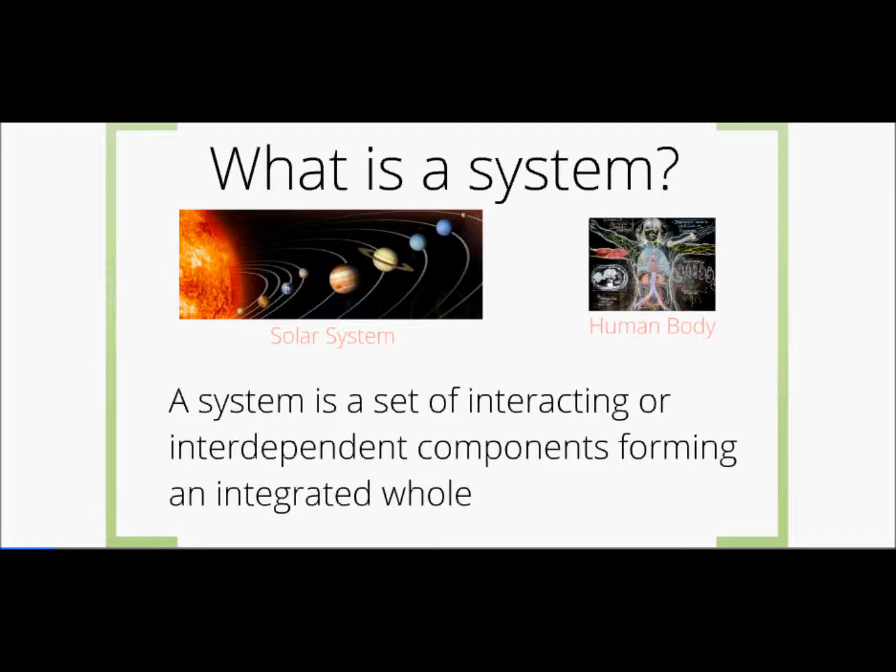What is a system? A system is a set of interacting or interdependent components forming an integrated whole. Any small problems in the system may lead to whole system failure.

We can find such an incident in the case of Toyota, where small components have been found to have quality issues, and the company has had to recall all related models, resulting in lost customer confidence.

The tsunami in Japan and flooding in Thailand disrupted the supply chain in consumer electronics and show how global supply chains are linked. At the system level, we are working on the issue of how to analyze, integrate, and manage systems.

An example of a poorly designed system is illustrated by the Far Side cartoon. This would not be an effective nor efficient system, as the boat would go around in circles as a result of the imbalance.

Let's see a simple view of a manufacturing system. A unit process at small scale can be integrated into a larger scale of complex processes.

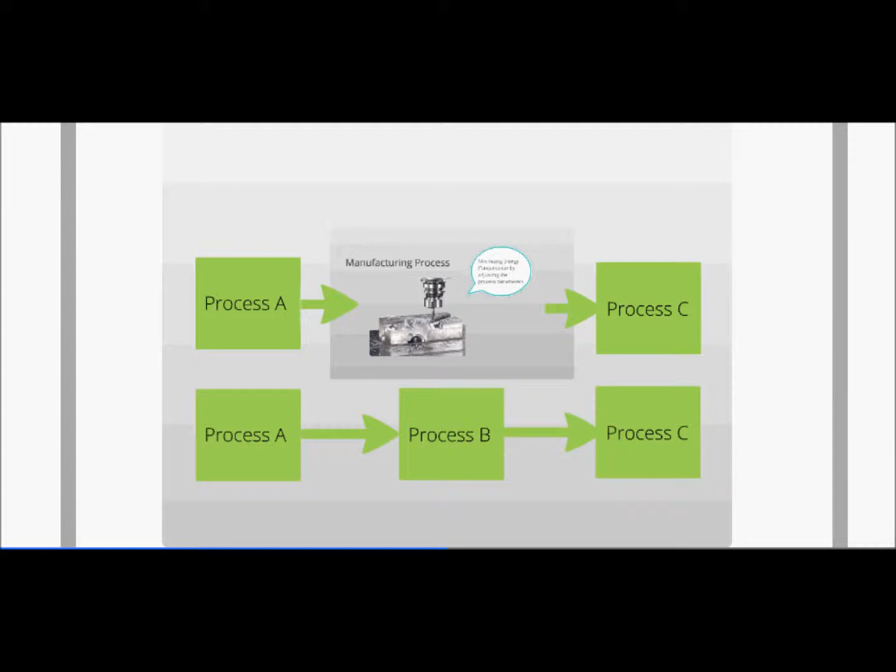With logistics support, this system can be extended to supply chains of products. A factory is composed of various machine tools.

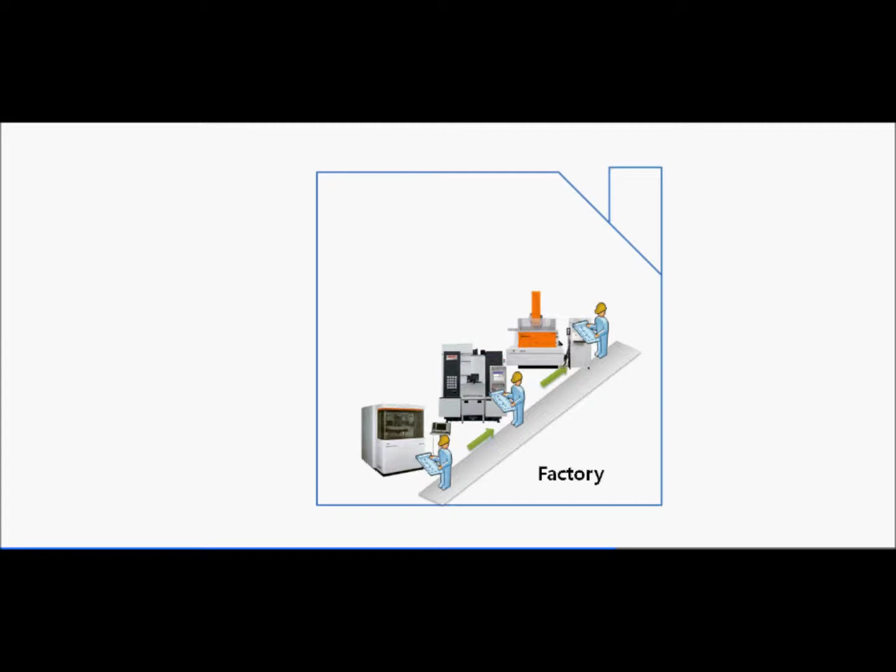In this factory example, there are 3 processes. To manufacture the products, the factory needs to define manufacturing structure among different processes and material flows. On the other hand, the factory needs to share product-related information across processes.

Due to huge amounts of data, generally data management systems are used in the factory to keep the system in control and processes working together.

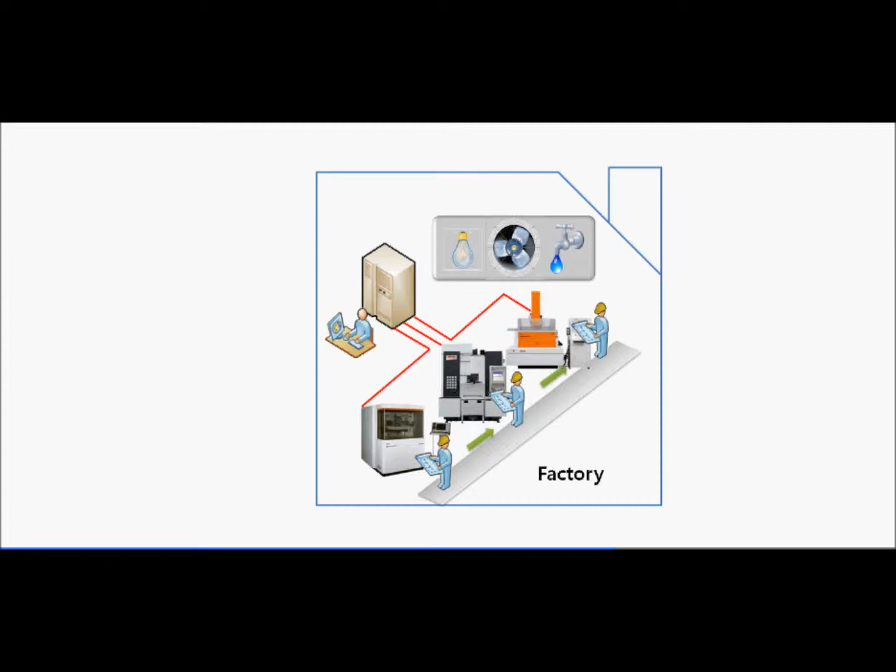Inside this factory, supporting utilities like lighting, HVAC, and water are also important. This is the factory system, and if we extend our boundary further, there would be a larger system which includes this factory. Going up one level, we have the whole supply chain as our system boundary.

In LMAS, we are also interested in greening supply chains. One of the related projects in LMAS is to find out the supply chain network design to minimize greenhouse gas emission.

In this project, we need to decide where to locate a warehouse and how to ship products from the manufacturing facility to the warehouse. This problem can easily be extended to other parts of the supply chain.

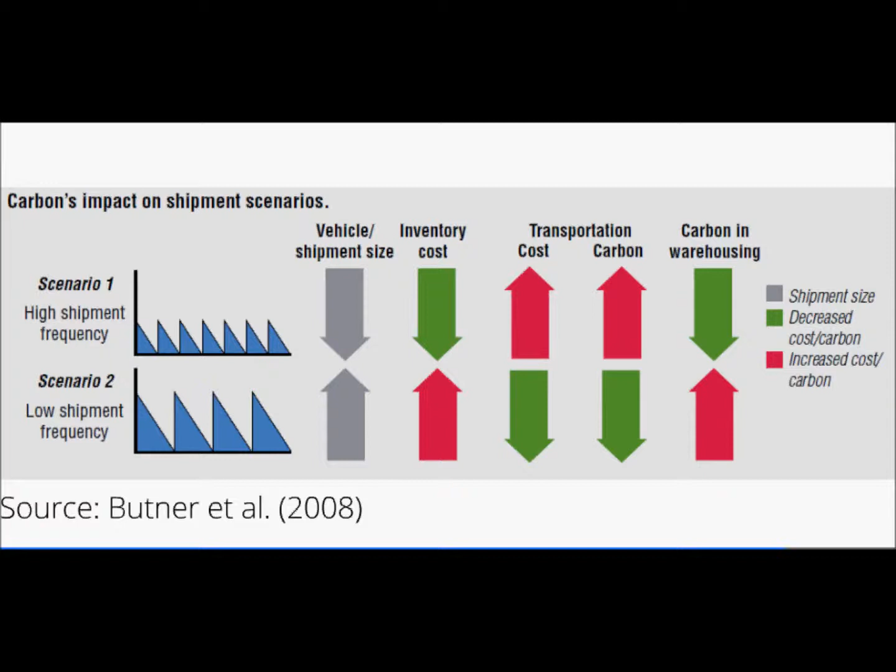With this problem, it is important to characterize and understand the relationship between transportation and warehouse activities. The relationship has to be included in the whole system in order to find the optimal supply chain design that minimizes carbon emission.

For many products, the manufacturing system can be viewed as a web-like or inverted pyramid structure where smaller processes feed into larger ones.

This is, of course, an oversimplification, but it demonstrates the basics of how the manufacturing structure as a whole is laid out. In LMAS, we are working on developing sustainable manufacturing technologies through various projects and continually improving the system.